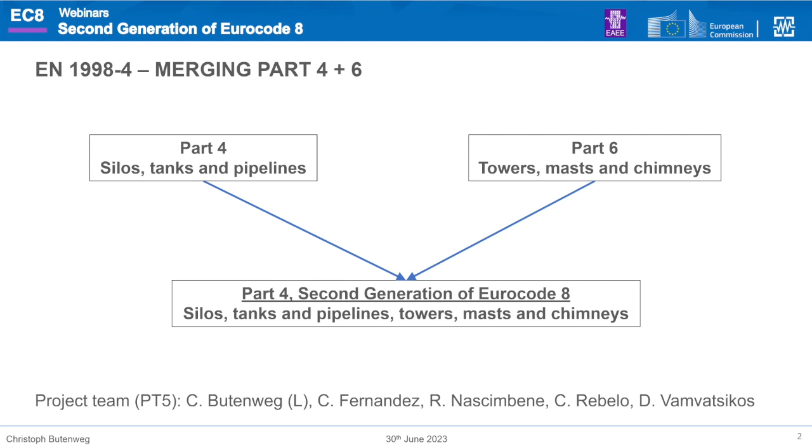So the scope of Part 4 is the design of specific structures. So which kind of structures are covered? First of all, we are covering in Part 4 elevated and on-ground silos and tanks. This means that we are also covering different geometries: cylindrical vertical tanks, cylindrical horizontal tanks, rectangular tanks, and we also have some rules for embedded tanks, which are also needed in practice. The second aspect is pipeline systems.

Pipeline system means that it's not only related to the pipeline itself, it's also related to installations along the pipeline and interconnections with other pipelines, because this is also quite important. Furthermore, we have to mention that we need above ground and buried pipelines. Above ground pipelines, for example, are resting on foundations and pipe bridges. And buried pipelines are usually used for the gas transportation network or the water supply.

So then, as I already mentioned, we are covering Part 6: towers, masts, and chimneys. And there is a new topic included in Part 4: ancillary elements attached to the structures that I mentioned before, but also to other primary systems in industrial facilities. So the question is, why is it needed? Because ancillary elements are also covered in Part 1-2. There are some aspects that are specific for industrial facilities, and these aspects are covered in Part 4. But Part 4 is not contradictory to Part 1-2; it complements Part 1-2.

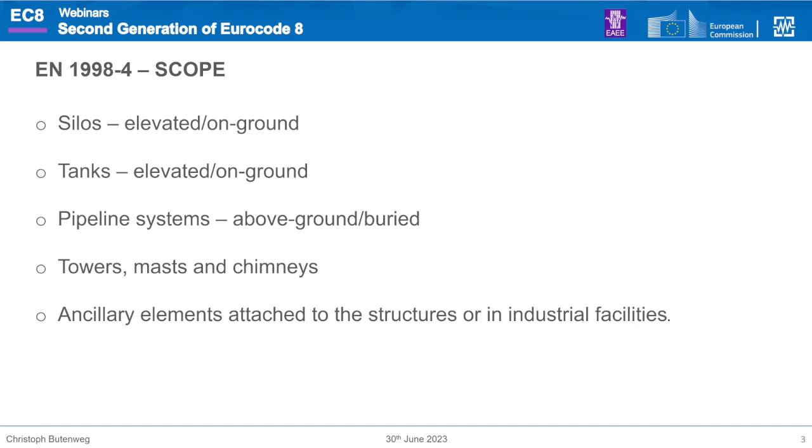So if we have a closer look on the content, we have 3 more or less general chapters, and within these general chapters, the variables are defined, the scope, and some basic rules. So what I'm going to present is the basis of design in chapter 4, and then from chapter 5 to 10, we will find the rules for the specific structures that I mentioned before.

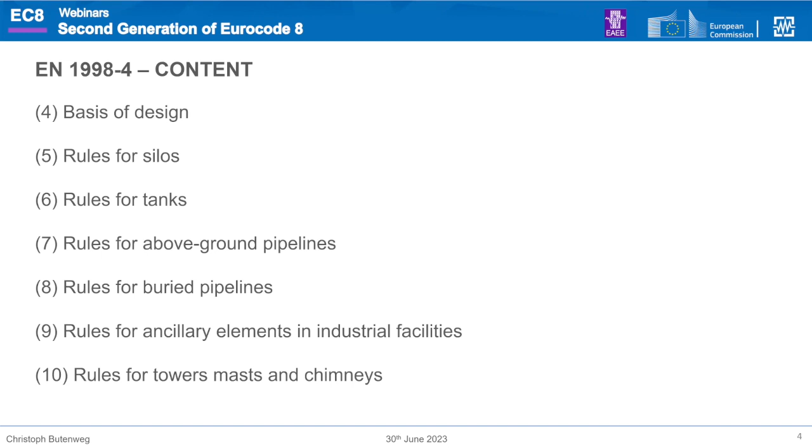So 5 to 10 will be presented today, and in the introduction, I'm more or less talking about the basis of design. And this is also quite important to know and to understand the structure. So everything that is related to all specific structures is placed in the basis of design. Everything that is specific is moved to chapter 5 to 10. So that is the basic structure in order to avoid repetitions.

Furthermore, it was necessary to include 5 annexes. So the first annex is a table for the seismic design of tanks, which is normative. The reason is that we would like to provide a force-based design for tanks, which can be easily applied in practice. I will present this Annex A, which is one of the main changes to the older code or to the first generation within this introduction.

So then Annex B is the soil structure interaction effects of tanks. So it complements part 5, but it makes also reference to part 5, so it's not doubled. Annex C is constructive rules and general design considerations that have nothing to do with the design. But if you are following such rules, you can save time in your design. So these are more or less general rules that you can follow so that you're not entering any problems in

the seismic design. Furthermore, we need some soil structure interaction descriptions to the surrounding soil for pipelines. So these rules will be introduced later on. So mainly some spring laws that allow us to consider the effect of the surrounding soil in a simplified way.

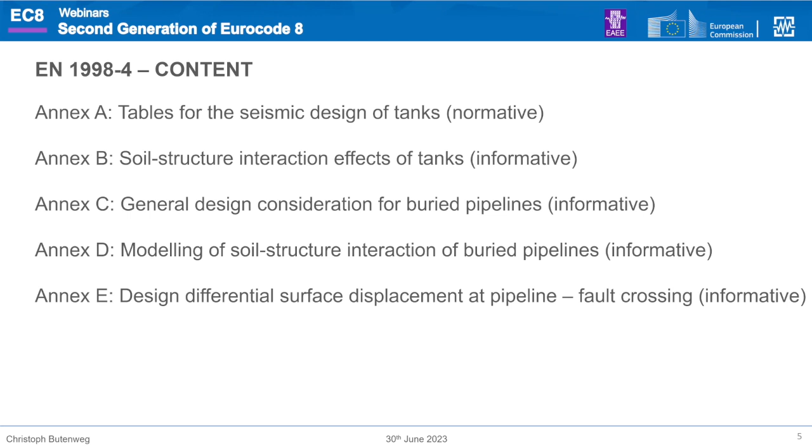So if we look closer on the performance requirements to the structures that are covered by part 4, we can see that we have to meet the performance requirements with respect to limit states and consequence classes. Limit states and consequence classes are already defined in part 1.2, but refined for part 4, because we have to consider the specific demands of these higher risk structures.

So the requirements are as follows. The first requirement is the protection of human lives and personal injuries. That is more or less in line with the one that we already know for usual buildings. Then we have to take care for the protection of environment. So that means we should be aware that we are probably handling toxic substances that can be spread into the air, into the water, or into the soil. So we have to be very careful because that can influence the inhabitants in the surrounding or in the region.

Furthermore, we need to consider that lifeline systems should be functioning after an earthquake in order to be ready with civil protection measures. And we should also try to avoid cascading effects within plants, so among production units, within one production unit, but also we have to keep in mind that some of the plants are placed in regions with residential areas around for historical reasons, for example, and we have also to avoid effects on these neighboring regions, which will also cause loss of human lives and injuries.

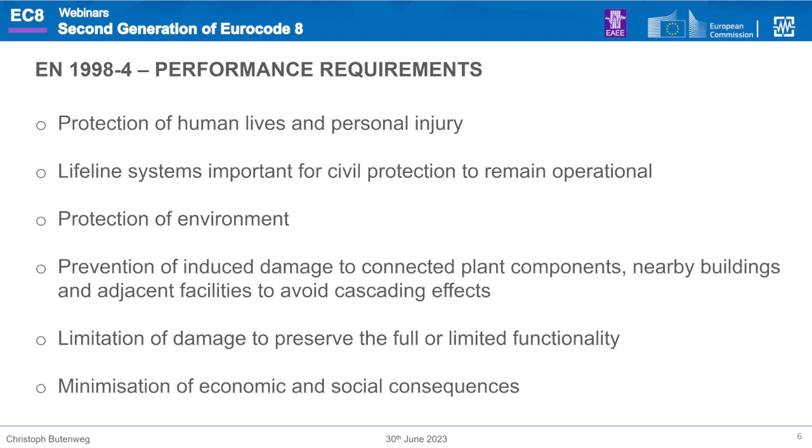Another point is the limitation of damage to guarantee the functionality. And this will also minimize the economic consequences. So if I have a really long downtime of 1 year, I will lose a lot of money. So that is an economic reason, but there is also a risk that I will disturb the supply of goods to the people. And this is another point why we have to follow the design rules which are given in part 4.

So the limit states that we defined for the specific structures are shown here. First of all, the main focus is the verification of the SD limit state. The SD limit state is defined as we are allowing significant damage, but the structural integrity should remain, and we allow only a controlled leakage of contents, which can be achieved by specific measures.

On top of that, it is possible to define also damage limitation and operational limit state. In case of damage limitation, the basic idea is to limit the damage and to have the chance to be faster operational after an earthquake, so I can carry out checking and control, and then I'll be ready with the operation of the system again. And again, we have to take care for liquid filled systems that they should remain leak-proof.

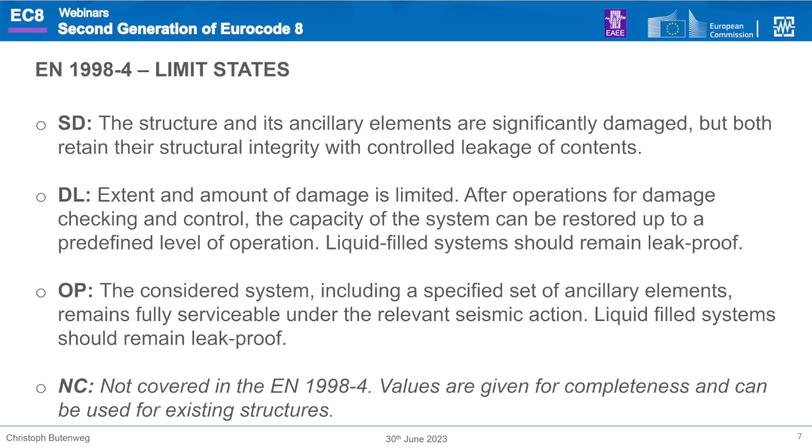Operational limit state is more or less one level higher. So this is more or less defined by, for example, the production operator or the owner. So if you would like to continue with the operation, then we have to make it more safe. So what is not covered is NC limit state, although values are given for return periods and performance factors in part 4, but it is only given for the compatibility with part 3 for existing structures.

So if we have a closer look at the consequence classes CC3 and CC4, we can see that CC3 and CC4 are specifically defined in part 4. The first consequence classes can be taken from EN 1990, and CC3B are structures that are important for public safety and the environment. And we should also keep in mind that we should not affect nearby buildings or adjacent facilities. There is another criterion for CC3B mentioned in part 4.

It should not influence the operation of civil protection services. So we should be ready to start with these services after an earthquake, and that should not be hindered by the damage due to the industrial facilities.

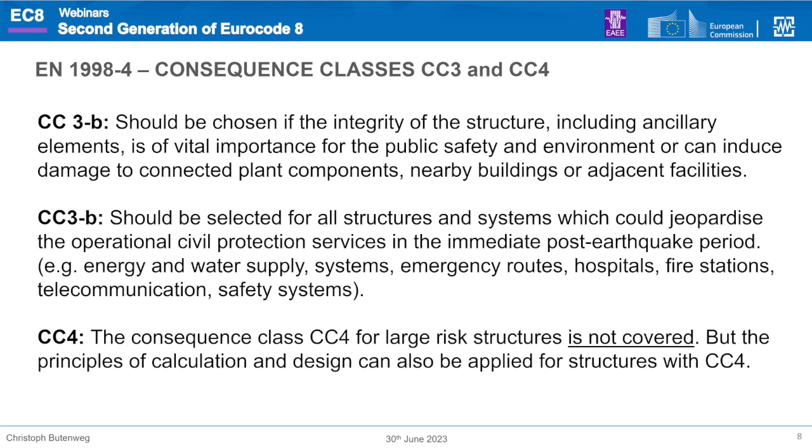The consequence class CC4 is not covered in Eurocode 8, and it is the same as in the other parts, so we are not covering it, but it is mentioned that the principles of design can also be applied in CC4. That means other codes can make reference to part 4 if they would like to use the principles of design.

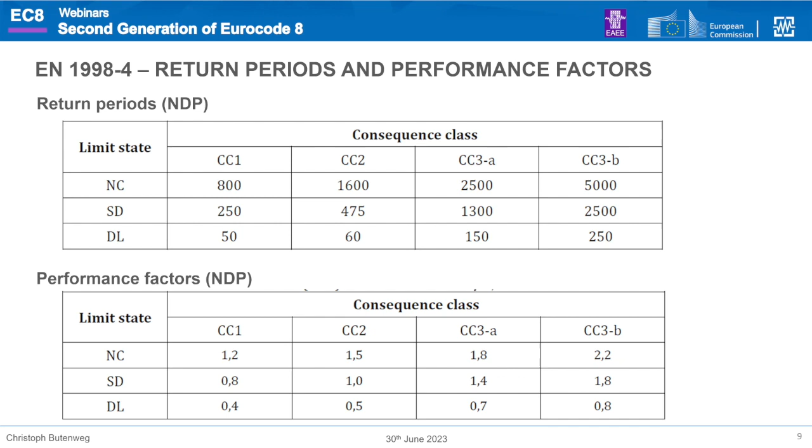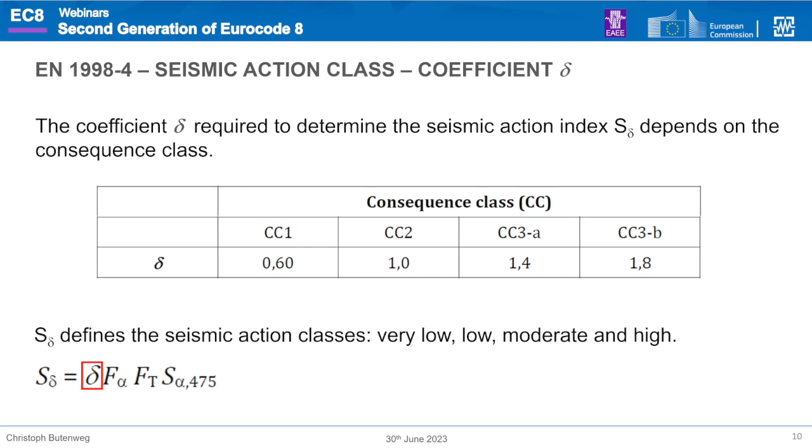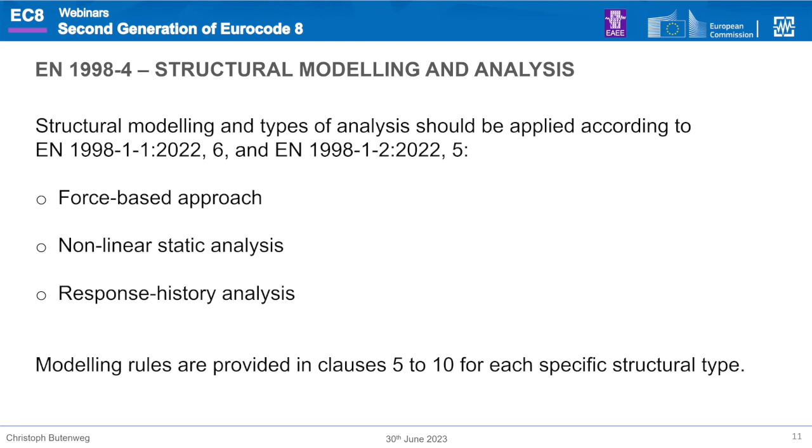So what are the structural modeling and analysis options? We have 3 options: force-based approach, nonlinear static analysis, and response history analysis. But the main focus is on force-based analysis, because we would like to have reliable and easily applicable rules in order to provide load-bearing reserves to these structures. The modeling rules and all other details will be presented later on, because they are included in chapters 5 to 10.

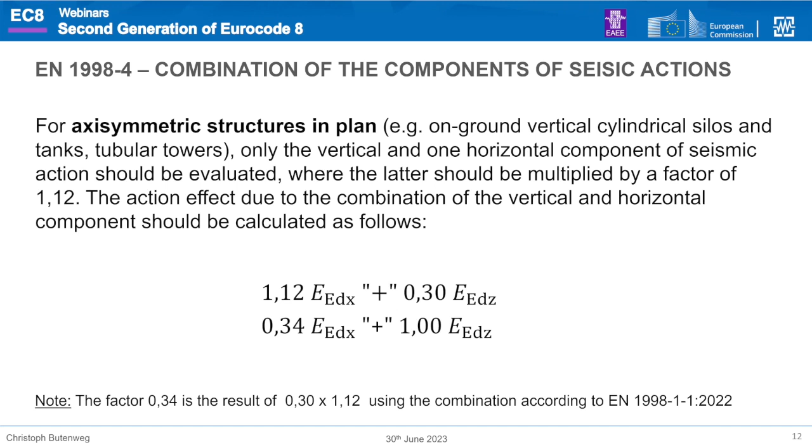There's one specialty, because we also have to handle structures that are axisymmetric in plan, like tanks or silos. For these axisymmetric structures, we are using a different combination rule in comparison to part 1-1. This rule was developed during the evolution of part 4. It was published in a reviewed paper, and all the details are provided in the background document. So I will not go into the details, but that's what we are using here for the combination.

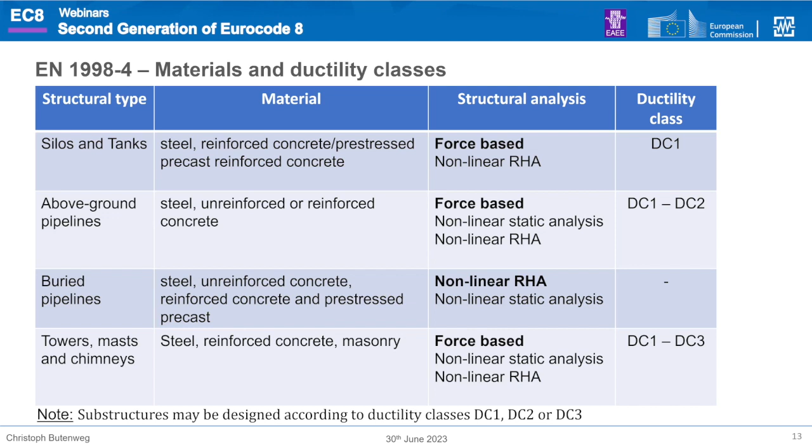So just a short overview again: silos and tanks, above-ground pipelines, buried pipelines, and towers, masts, and chimneys. The main focus is force-based design, and the other possibilities for calculations are also provided, but in a second line. If we have specific problems, then we can also use these more advanced techniques. They are not forbidden, but it is recommended to use force-based design to have robust design rules.

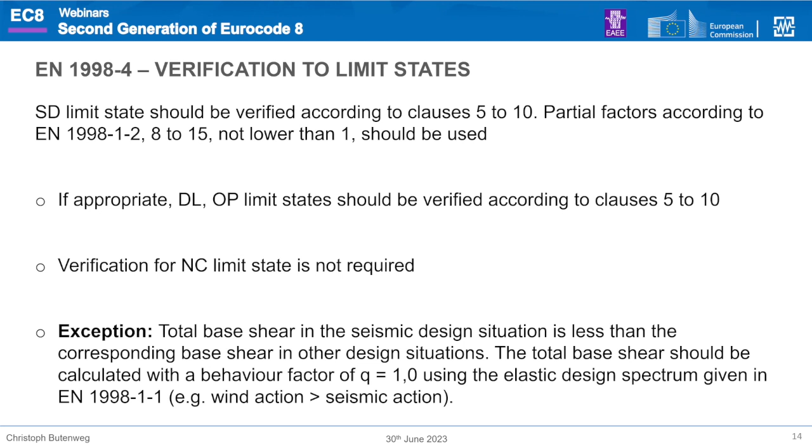But in this case, we have to apply a q factor of 1.0 and the safety factors that are usually used in the load combinations for wind. So this is an exception. In that case, we don't need to verify the SD limit state and also the other limit states that I mentioned before.

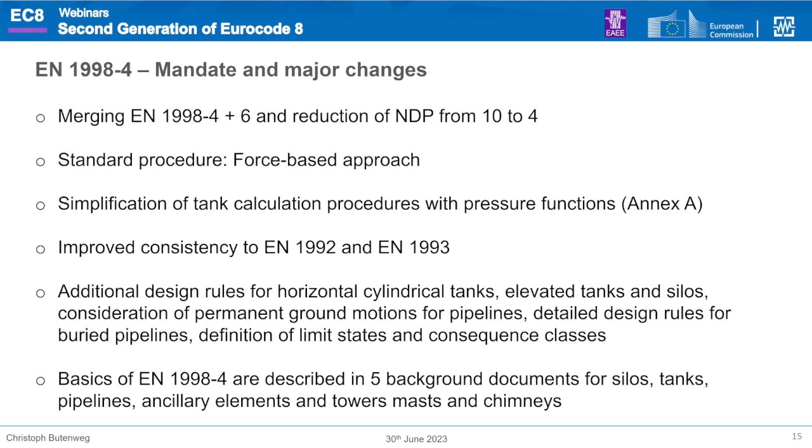I would also like to mention that we have in total 5 background documents that can be used for studying the details and the reasons for the implementation. These background documents are available and can be used for a more detailed study of this code. So this was more or less a short introduction to part 4.